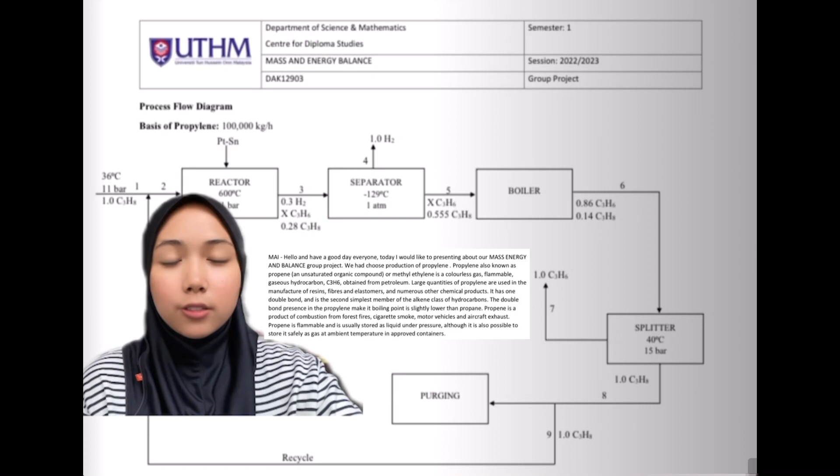Producing 100,000 kg per hour of propylene is the major goal of this process. Because it is the simplest reaction, dehydrogenation of propane was selected as the required reaction. Reactor, catalyst regeneration, and product recovery are the three primary parts of the plant. One reactor, two separators, a boiler, and a purge are employed in the production of propylene to allow all of the chemicals to be supplied with their sinks.

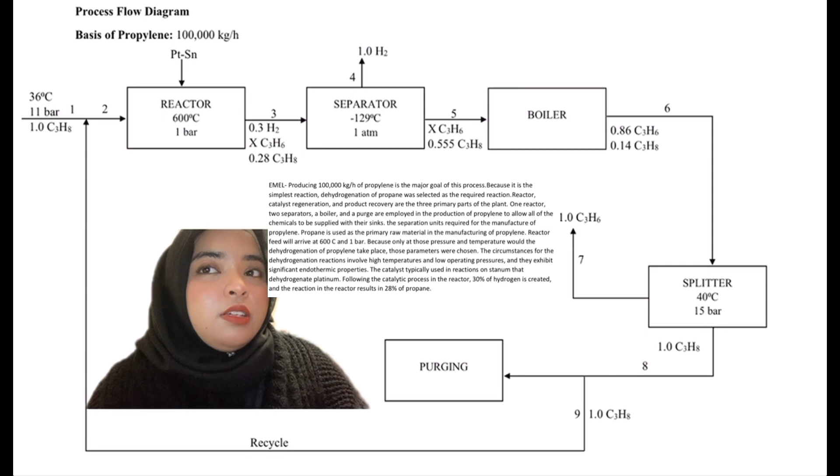The separation units are required for the manufacture of propylene. Propane is used as the primary raw material in the manufacturing of propylene. Reactor feed will arrive at 600 Celsius and 1 bar because only at those pressures and temperatures will the dehydrogenation of propane take place. Those parameters were chosen.

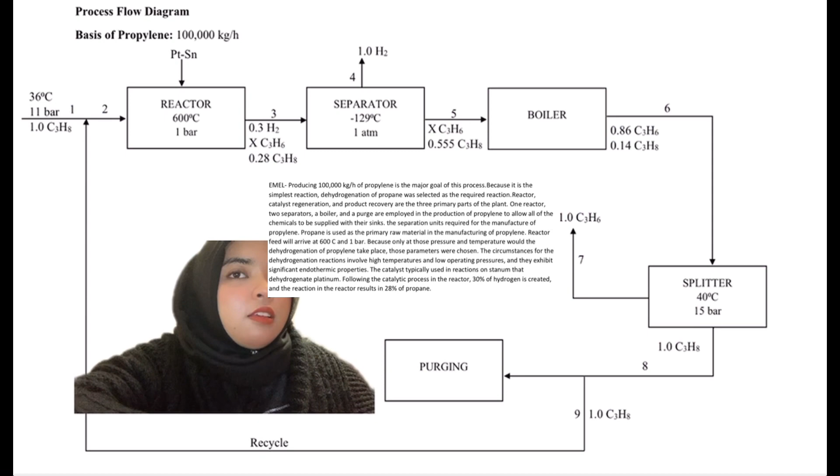The conditions for the dehydrogenation reactions involve high temperature and low operating pressure, with significant endothermic properties. The catalysts typically used in the reactions are stannum and platinum. Following the catalytic process in the reactor, 30% of hydrogen is created and the reaction in the reactor results in 28% of propane.

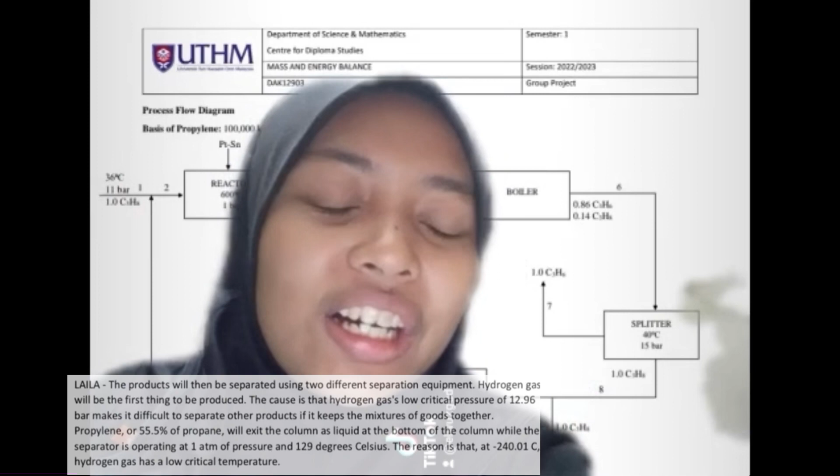Hi, my name is Laila Syafiah Bintazan and I will elaborate more about this plant. First of all, the product will be separated using two different separation equipment. Hydrogen gas will be the first thing to be separated, which is here. The cause is that hydrogen gas has a low critical pressure of 12.96 bar, which makes it difficult to separate other products if the mixtures are kept together. So because of the pressure, it is difficult to separate the products.

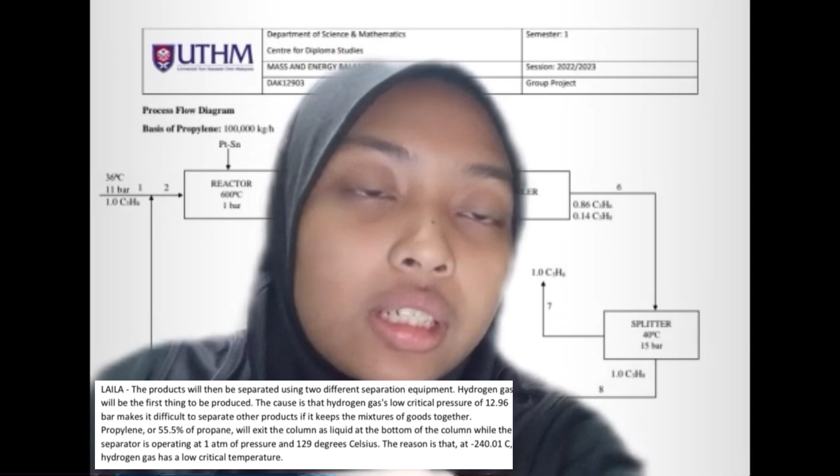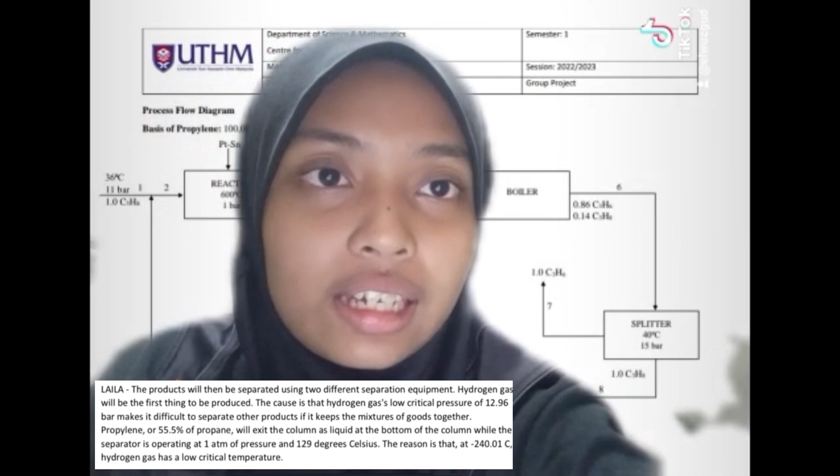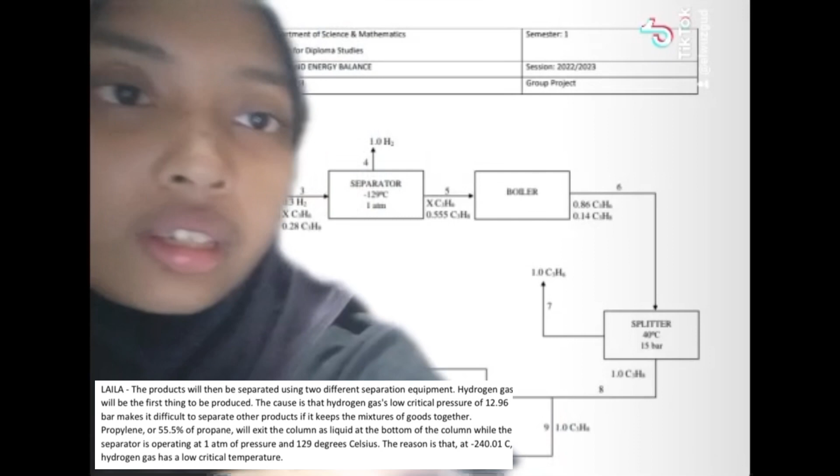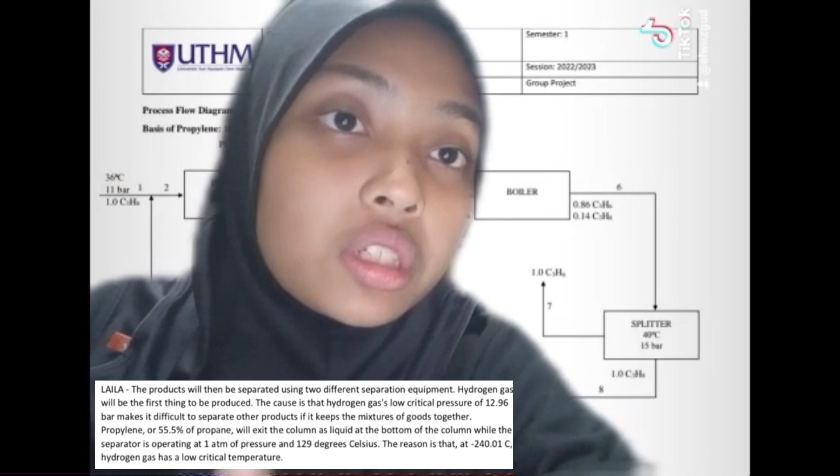And then propylene, or 55.5% propane here with propylene, will exit the column as a liquid at the bottom, while the separator is operating at 1 bar, I mean 1 atm of pressure, and negative 129 Celsius, which is here. And the reason is that at negative 240.01 Celsius, hydrogen gas has a low critical temperature.

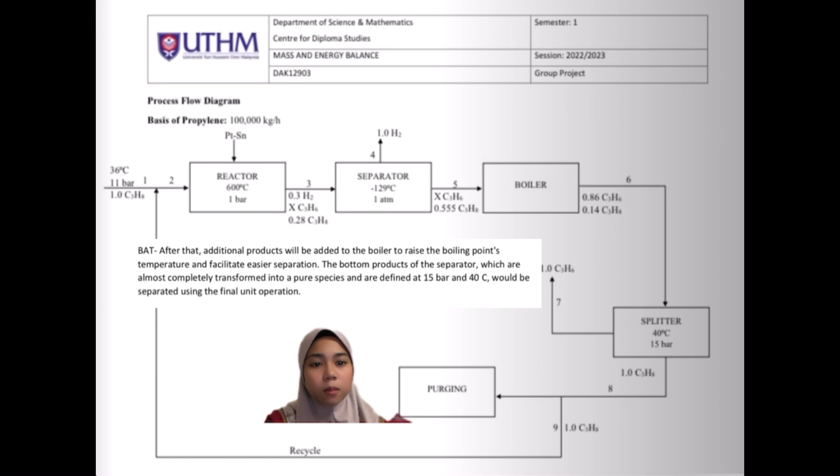After that, additional products will be added to the boiler to raise the boiling point temperature and facilitate easier separation. The bottom products of the separator, which are almost completely transformed into a pure species and are defined at 15 bar and 40 degrees Celsius, would be separated using the final unit operation. Next, under these same conditions, the nearly pure propylene boils at 33.06 degrees Celsius, and 86% of the propane is converted, leaving propylene as distillate, and the remaining 14% of unreacted propane at the bottom, which is recycled back to the reactor.

A purging unit is added at the end of the process to ensure there is little buildup from the recycled stream feeding back into the fresh feed, preventing dilution of reactants due to waste chemicals.

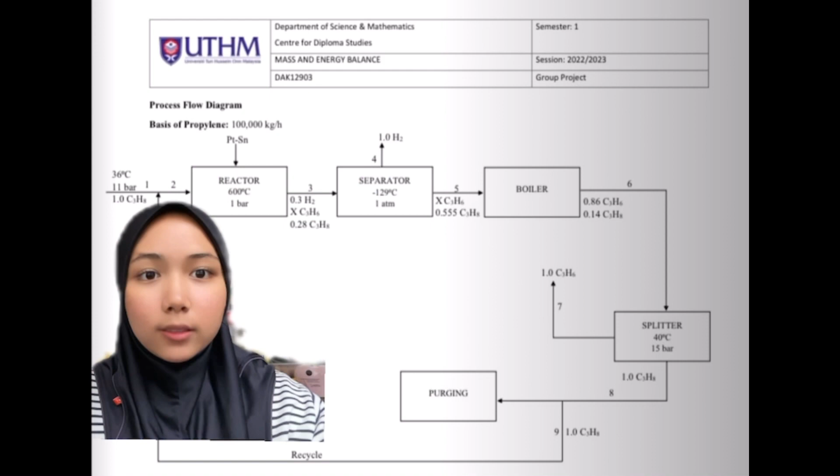So the conclusion from our process is that one of the primary industrial chemical building blocks used to create a variety of chemical and plastics products is propylene. Propylene is employed in many different industries, including the petrochemical sector, where it is used as a raw material in manufacturing. The two main uses of refinery propylene are as an octane-increasing component in motor gasoline or in liquefied petroleum gas for thermal consumption.

Polypropylene, propylene oxide, isopropanol, cumene, and acrylonitrile are the most significant derivatives of chemical and polymer-grade propylene. This demonstrates that the manufacturing of propylene has its marketability in the international sector, particularly in recent years, where the price of propylene is anticipated to keep increasing each year as the demand for the chemical material increases.

Extremely flammable, propylene is quickly ignited by heat, sparks, or flames. If exposed to fire or extreme heat for an extended period of time, propylene containers are susceptible to rupture. Propylene fire can release poisonous and irritating fumes. In the event of a fire involving a tank, rail car, or truck transporting propylene, the area should be isolated for 1 mile in all directions.